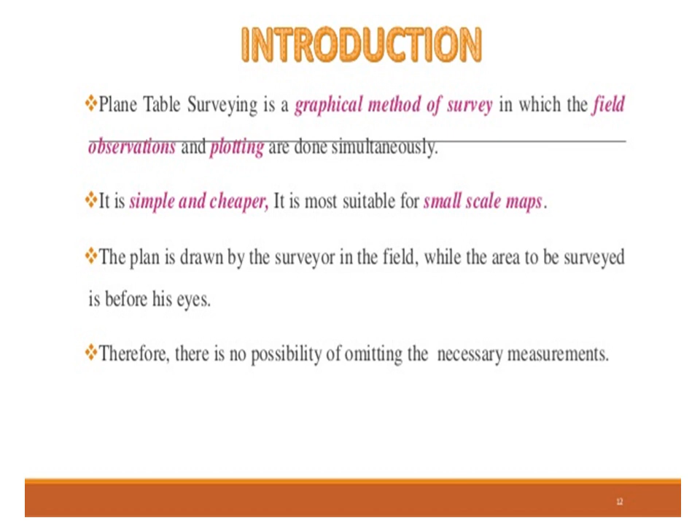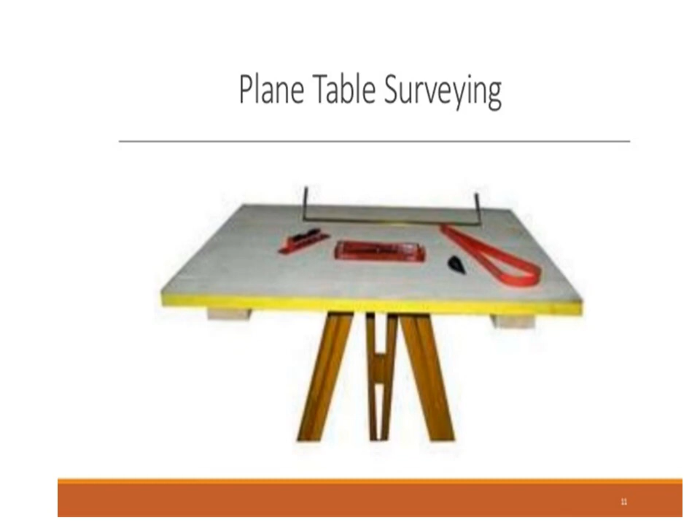This slide shows the accessories used in plane table surveying. They are plane table, spirit level, trough compass, U fork with plumb bob, drawing board and tripod stand.

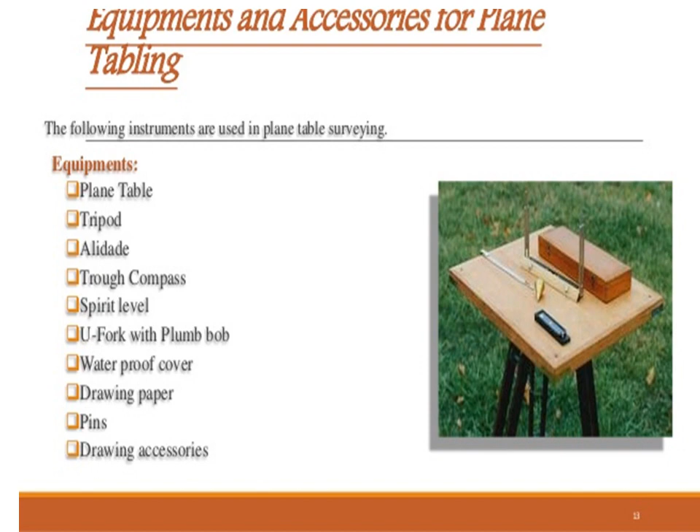Generally, the following equipments are used in plane table surveying: plane table, tripod, alidade, trough compass, spirit level, U fork with plumb bob, waterproof cover, drawing paper, pins and drawing accessories. The tripod is one of the accessories used in plane table survey.

The plane table is mounted on a tripod. The tripod is generally of open frame type with combined rigidity and lightness. The tripod may be made to fold for convenience of transportation.

Sometimes tripods are provided with a foot screw, but many times we have a wing nut which tightens the table and tripod together.

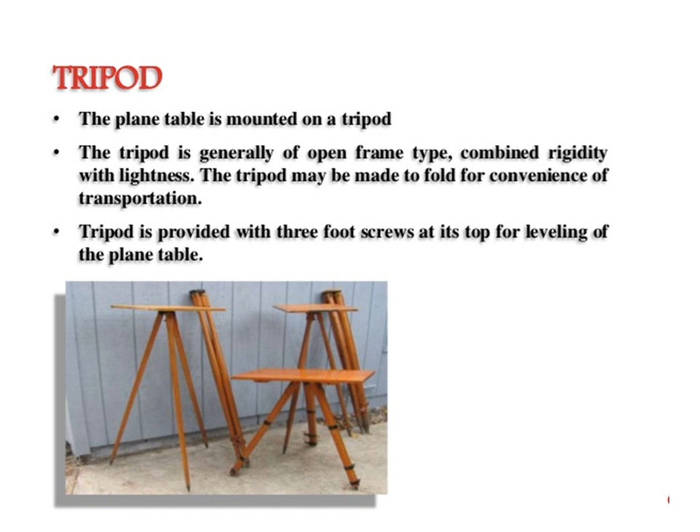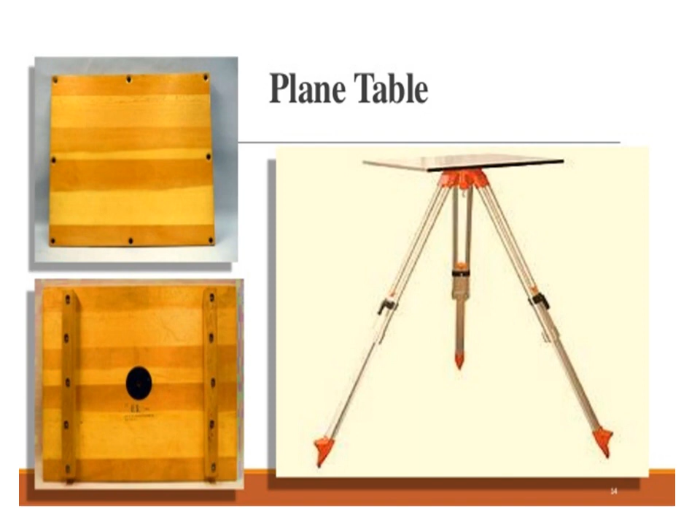This slide shows a typical figure of plane table with a stand. On the left is the top of the table, and below is the bottom of the table. The bottom shows the location where the wing nut is fixed to the plane table, so that the fixity of plane table and tripod is ensured.

The second accessory is the alidade. The alidade is useful for establishing a line of sight. There are two types of alidades used: one is the simple alidade and another is the telescopic alidade.

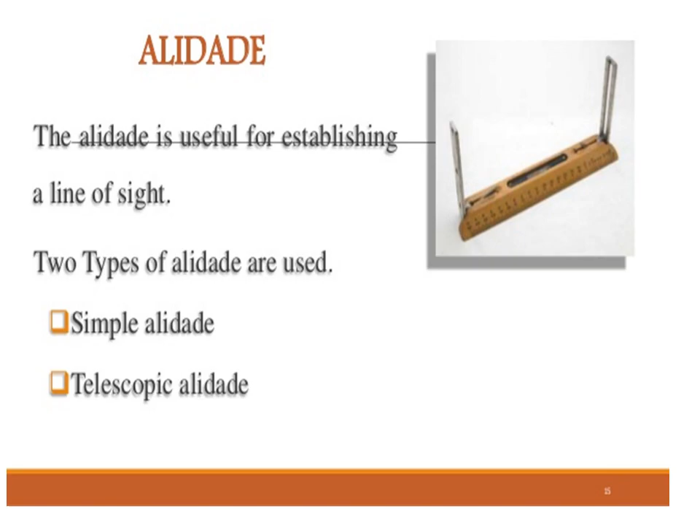The simple alidade is used for ordinary work. It generally consists of a metal or wooden rule with two vertical vanes at the ends. The eye vane is provided with a narrow slit, while the object vane is open and carries a horsehair. Both the slits thus provide a definite line of sight which can be made to pass through the object to be sighted.

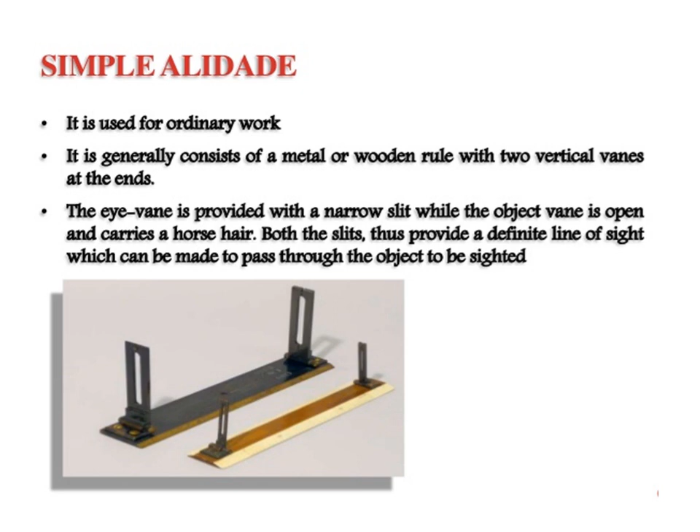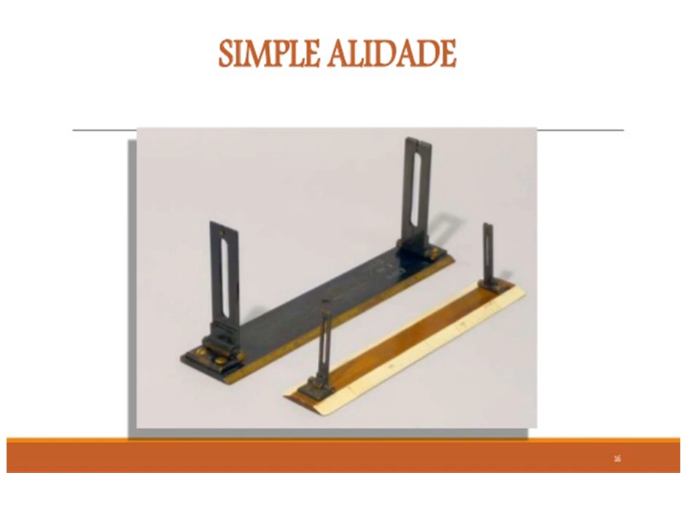This slide refers to the simple alidade, showing the two vanes. One is the object vane and another is the sight vane, with a beveled edge on the right side, which is used to establish a line parallel to the line of sight.

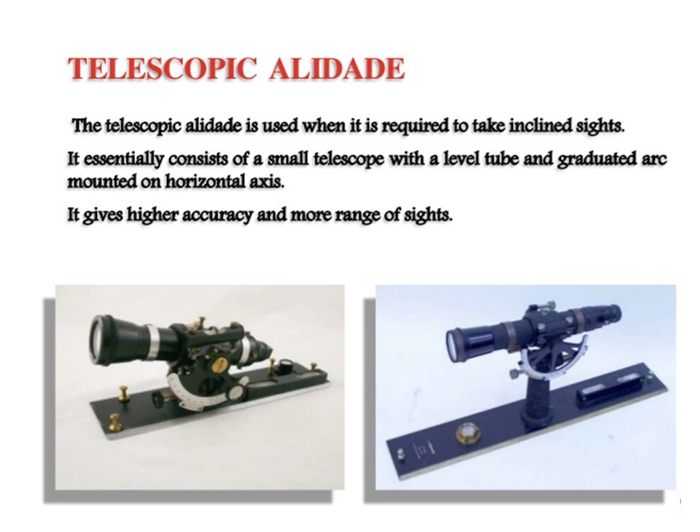This slide refers to the telescopic alidade. It is used when it is required to take inclined sights. It essentially consists of a small telescope with a level tube and graduated arc mounted on a horizontal axis. It gives higher accuracy and more range of sight, and is generally used to establish contours in case of the direct method of contouring.

This is the image of the trough compass, shown in a rectangular fashion as well as a square fashion with a wooden box. At the center you will observe the magnetic needle, and on the right you will observe the screw, which has to be loosened or tightened whenever the needle is along the north-south direction.

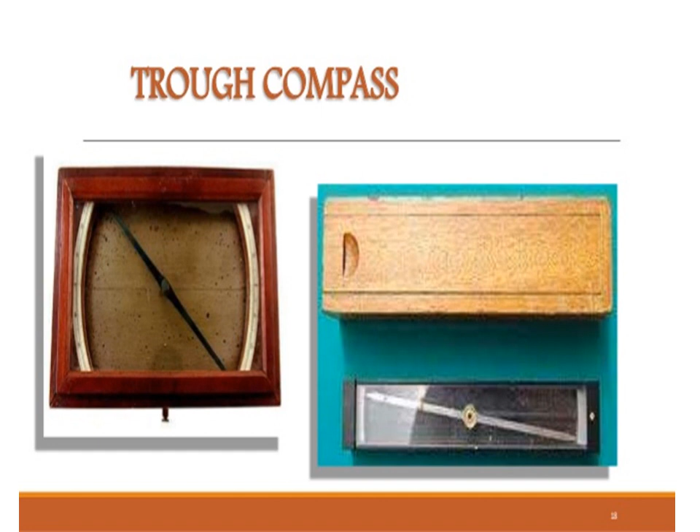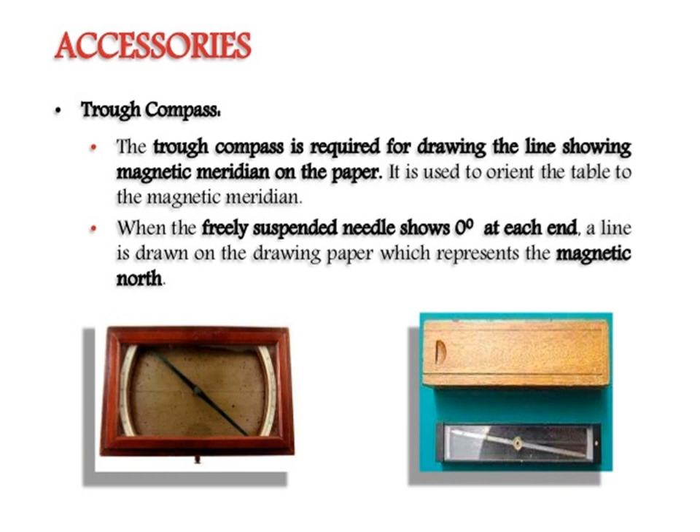The trough compass is required for drawing the line showing the magnetic meridian on the paper. It is used to orient the table to the magnetic meridian. When the freely suspended needle shows 0 degrees at each end, a line is drawn on the drawing paper representing the magnetic north. Then the next accessory is the spirit level.

A spirit level is used for ascertaining if the plane table is properly leveled. The table is leveled by placing the level on the board in two positions at right angles and getting the bubble centered in both positions, as shown in the figure.

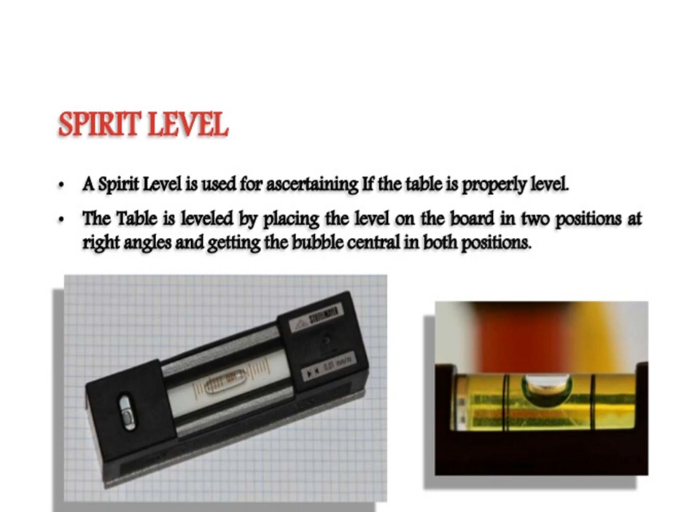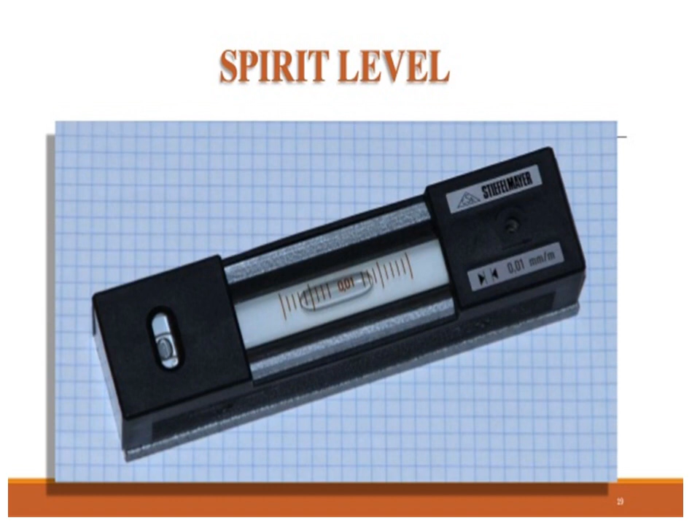This is the typical image of a spirit level, wherein you will observe the bubble which is not at center, so you can count the graduations on the right as well as left, and try to bring an equal number of graduations on left as well as on the right.

This is another accessory called the U fork with plumb bob. It is used for centering the table over the point or station occupied by the plane table when the plotted position of that point is already on the sheet. Also, in the beginning of work, it is used for transferring the ground point on the sheet.

The below figure shows the table with a U fork where the pointed end of the U fork is on the paper, representing the point on the paper, and when you drop a perpendicular, it meets the ground point along the plumb line.

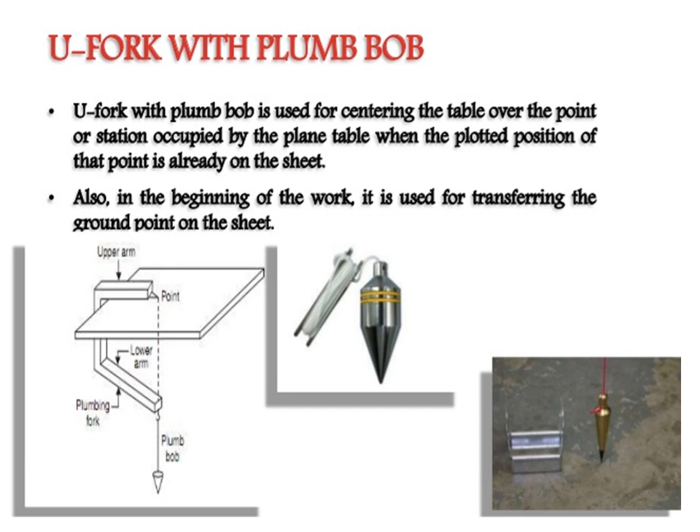Now we are going to see the advantages and disadvantages of plane table surveying. In this slide we will see the advantages of plane table surveying.

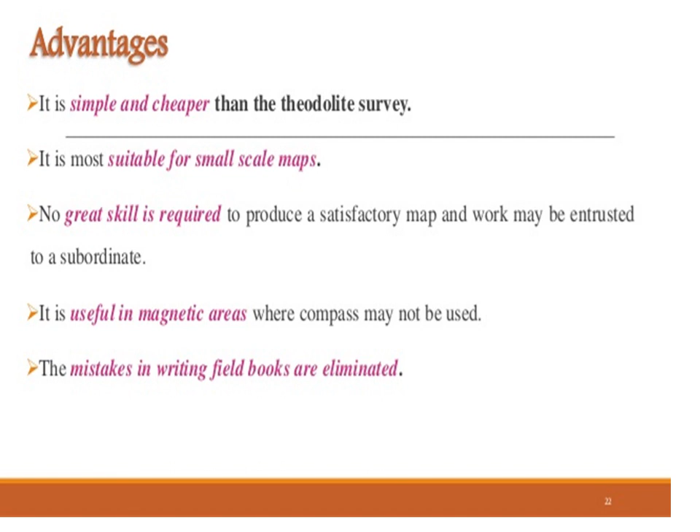It is simple and cheaper than theodolite survey. It is most suitable for small scale maps. No great skill is required to produce a satisfactory map, and work may be entrusted to a subordinate. It is useful in magnetic areas where compass may not be used. Mistakes in writing the field book are eliminated.

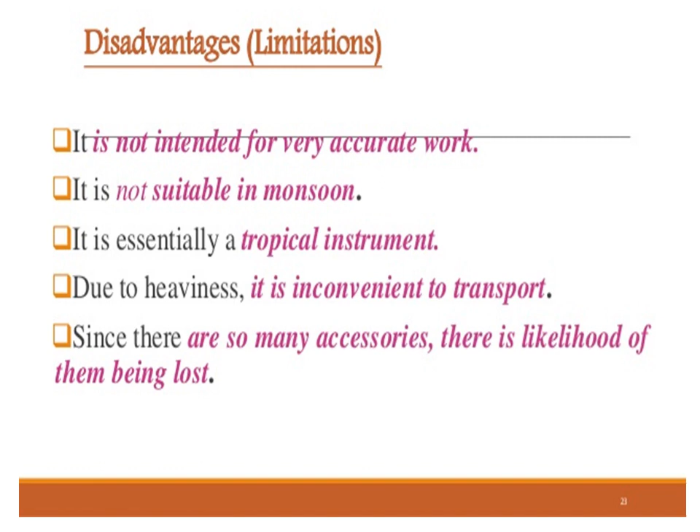This slide refers to disadvantages of plane table surveying. It is not intended for very accurate work. It is not suitable in monsoon. It is essentially a tropical instrument. Due to heaviness, it is inconvenient to transport. Since there are so many accessories, there is a likelihood of them being lost.

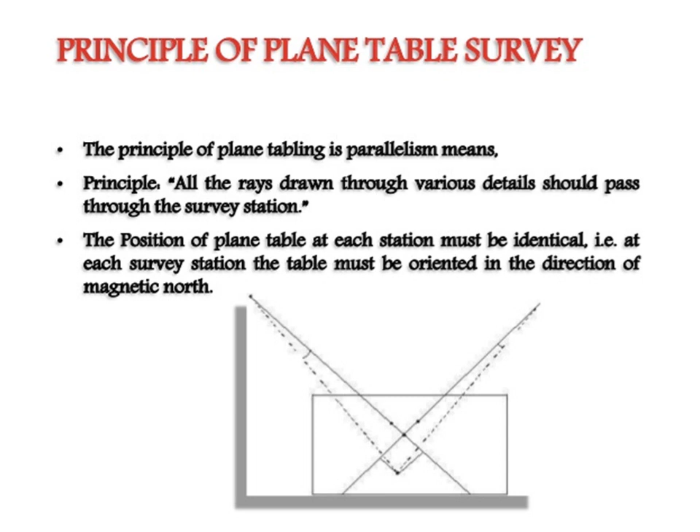This slide refers to the principle of plane table survey. The principle of plane tabling is parallelism, meaning all the rays drawn through various details should pass through the survey station. The position of the plane table at each station must be identical, that is, at each survey station the table must be oriented in the direction of magnetic north.

In this slide we are going to see the methods of setting up the plane table. Three processes are involved in setting up the plane table over the station: first is leveling, second is centering, and third is orientation.

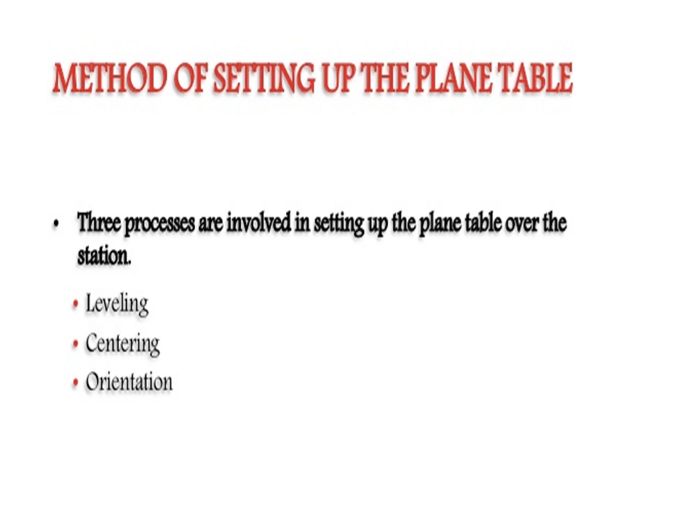This slide refers to leveling and centering. The table should be set at a convenient height for working on the board, say about 1 meter. The legs of the tripod should be spread well apart and firmly planted into the ground.

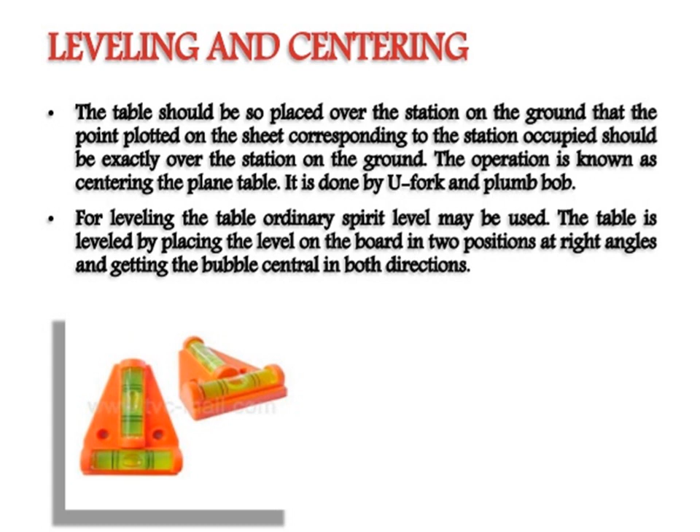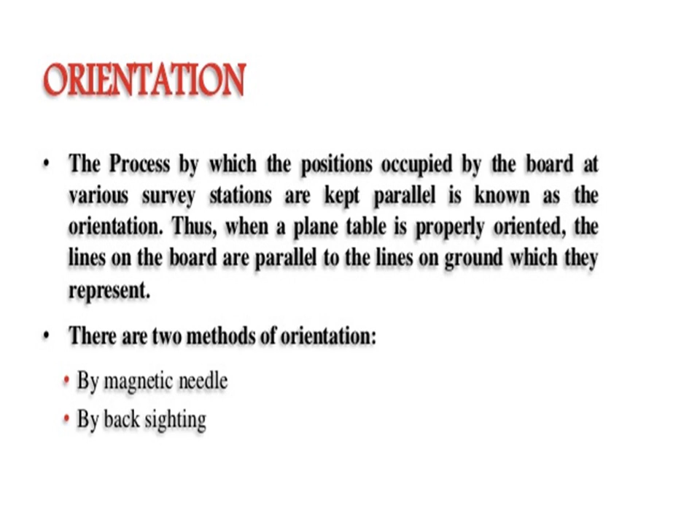The next operation is orientation, the process by which the positions occupied by the board at various stations are kept parallel is known as orientation. Thus, when a plane table is properly oriented, the lines on the board are parallel to the lines on the ground which they represent. There are two methods of orientation: one is by magnetic needle and the other is by backsighting.

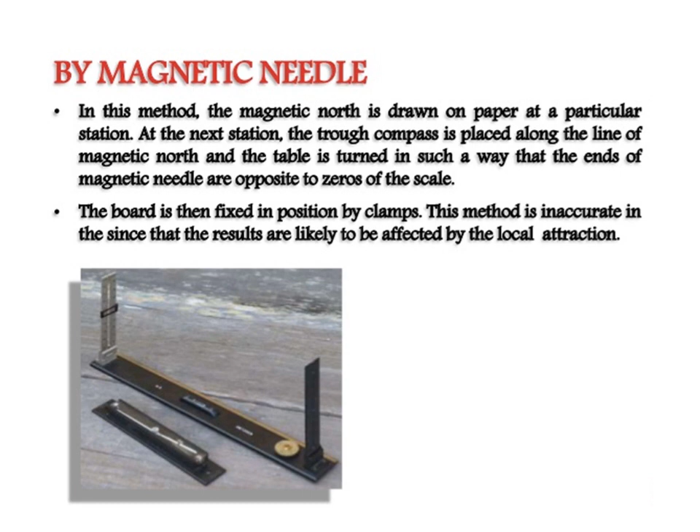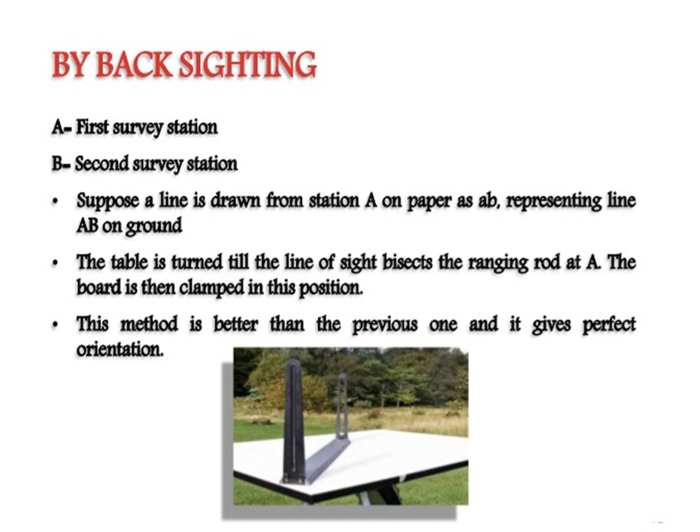Tripod is one of the accessories used in plane table survey. The plane table is mounted on a tripod. The tripod is generally of open frame type.

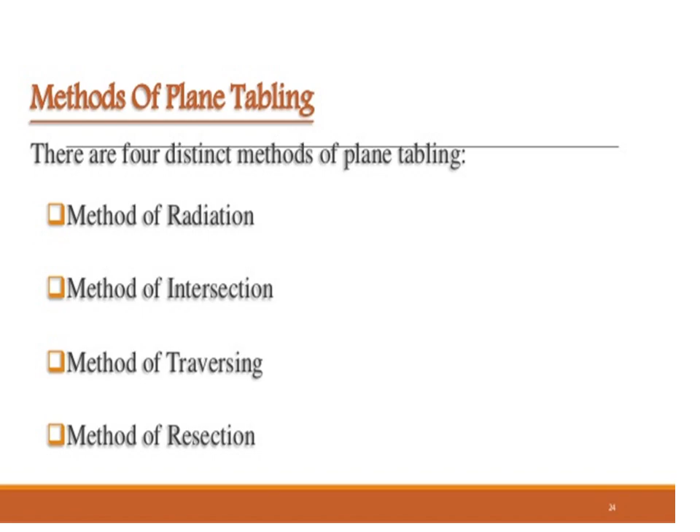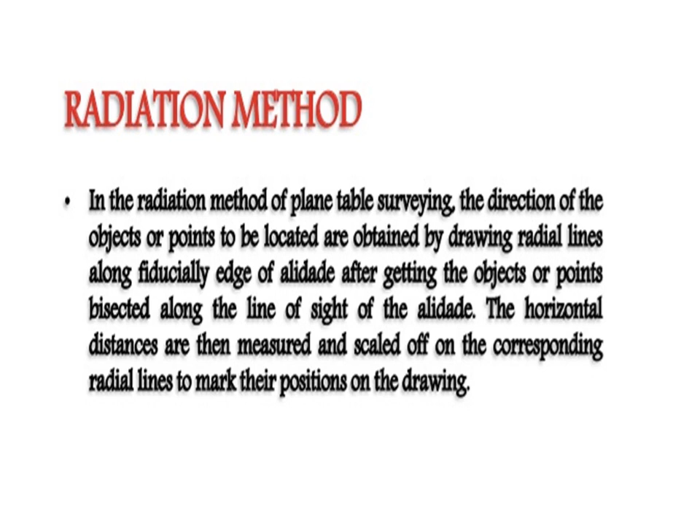In the radiation method of plane table surveying, the direction of objects or points to be located is obtained by drawing radial lines along the fiducial edge of the alidade after getting the object or points bisected along the line of sight of the alidade. The horizontal distances are then measured and scaled off on the corresponding radial line to mark their position on the drawing. So in this slide we are going to see the radiation method of plane table survey.

Suppose P is a station on the ground from where the objects A, B, C and D are visible. The plane table is set up over station P and a drawing board is fixed on the table, which is then leveled and centered. Then a small point p is selected on the sheet to represent the ground point P.

Then the north line is marked on the right hand top corner of the sheet with a trough compass or circular box compass. With the alidade touching small p, the ranging rods at A, B, C and D are bisected and the rays are drawn. The distances PA, PB, PC and PD are measured and plotted to any suitable scale to obtain the points small a, b, c and d representing the ground points capital A, B, C, D on paper.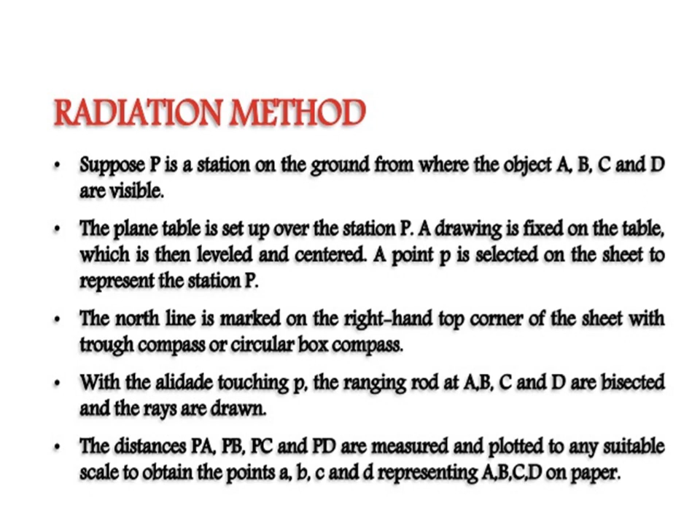In the simple alidade used for ordinary work, it generally consists of a metal or wooden rule with two vertical vanes at the ends. The eye vane is provided with a narrow slit while the object vane is open and carries a horsehair. Both the slits thus provide a definite line of sight which can be made to pass through the object to be sighted.

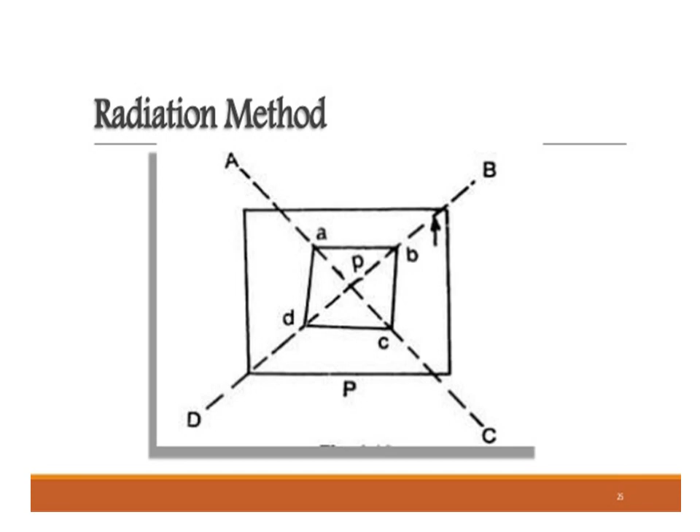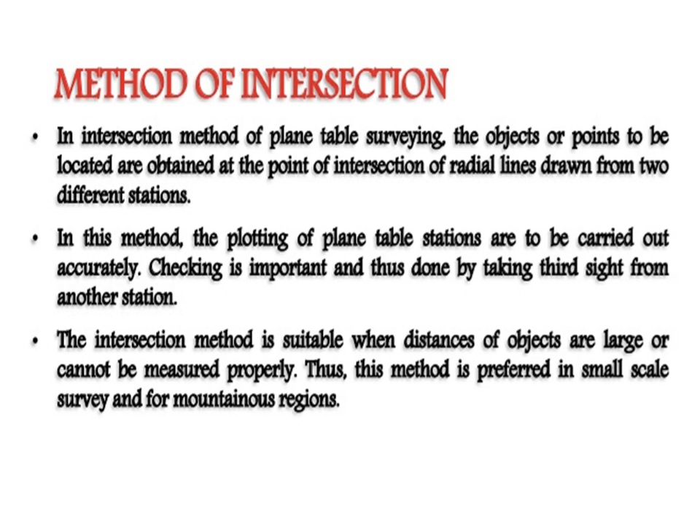In the method of intersection, suppose A and B are two stations, and P is an object on the far bank of a river. It is required to fix the position of P on the sheet by intersection of rays drawn from A and B, since P is visible but not accessible due to the river. The table is set up at A, leveled and centered so that a point on the sheet is just over station A. The north line is marked at the right hand top corner using a trough compass, and the table is then clamped. With the alidade touching small a, the object P and the ranging rod at B are bisected, and rays are drawn through the fiducial edge of the alidade.

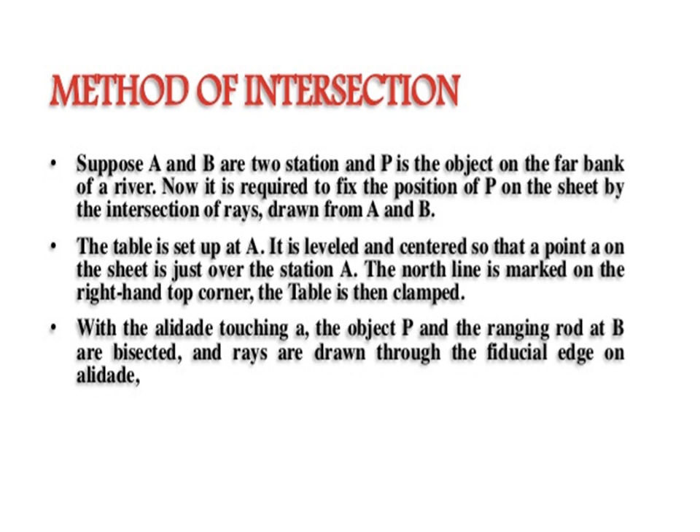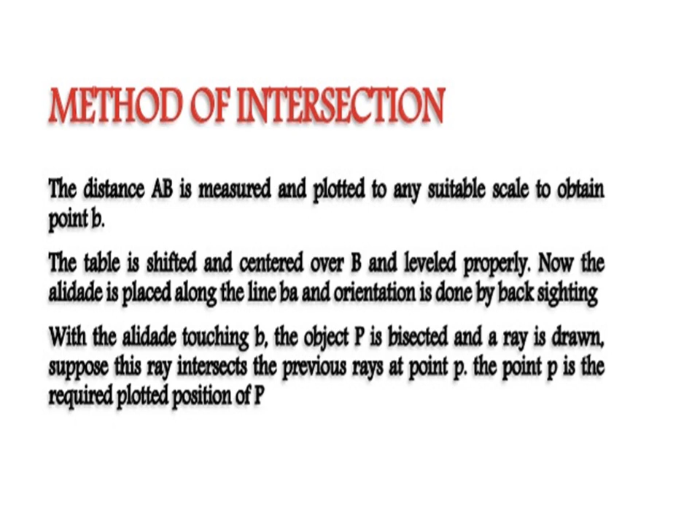From point B, we again place the alidade along the line BA so that the ranging rod at A is bisected, and then we establish a line of sight with the object P lying on the opposite side of the river. Where the two rays intersect is the position of P. This is the method of intersection.

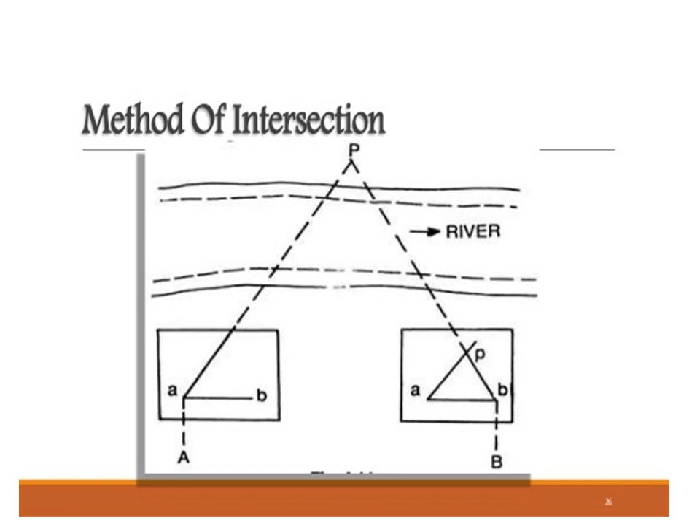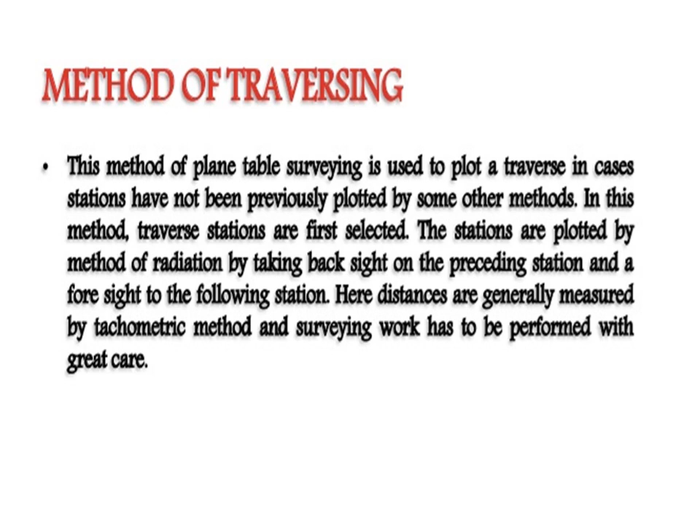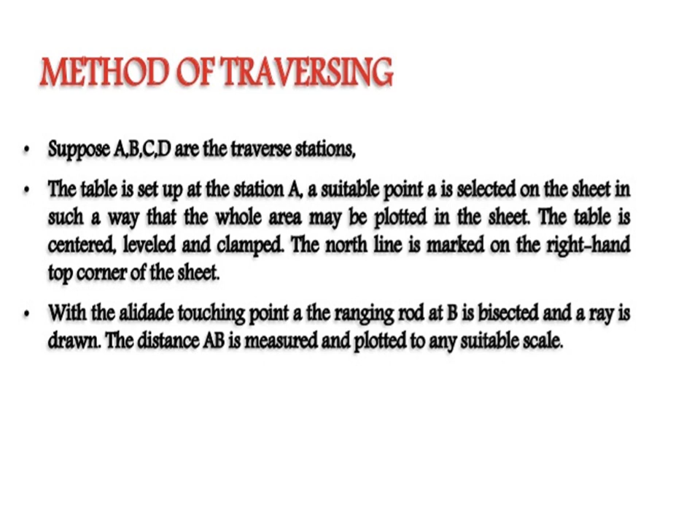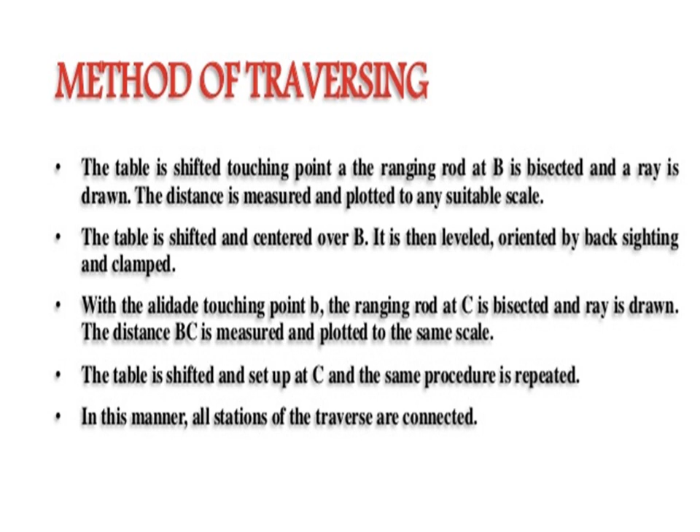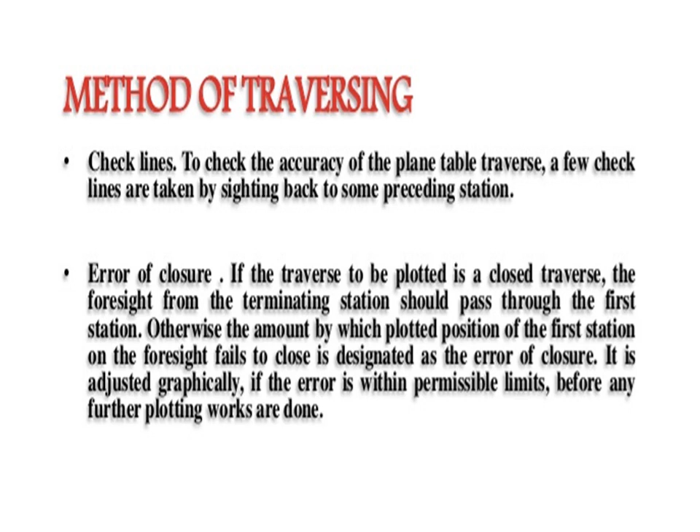This is called the method of traversing, where stations A, B, C and D are the positions of the plane tables. At each station we carry out three operations, namely centering, leveling and orientation, and after orientation we can locate the interior details inside the traverse stations.